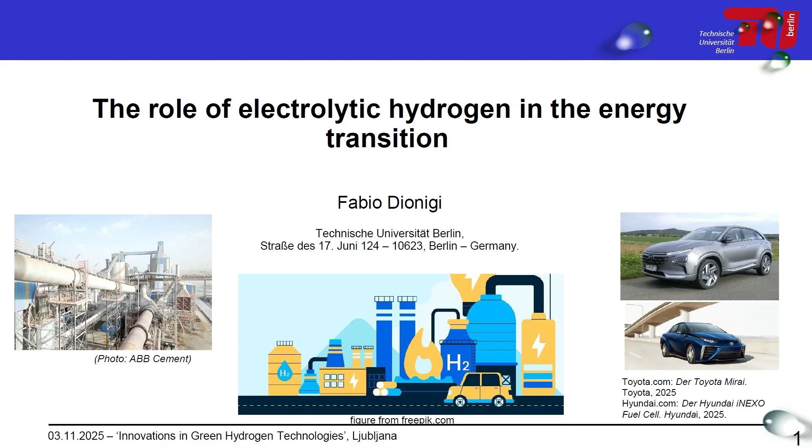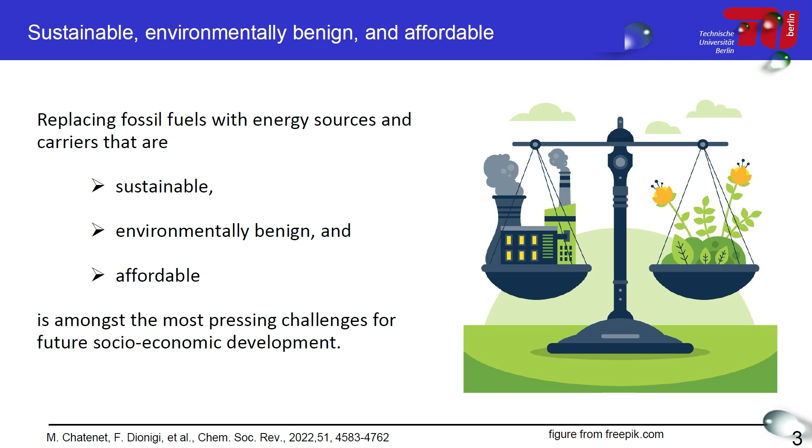What we are facing now is a great challenge to transform our society. A key part of this challenge is to replace fossil fuels with new energy sources and energy carriers that have to be sustainable, environmentally benign, and affordable. In order to do this, we can see that this challenge is strongly entangled with other processes, such as the growing population that we are experiencing.

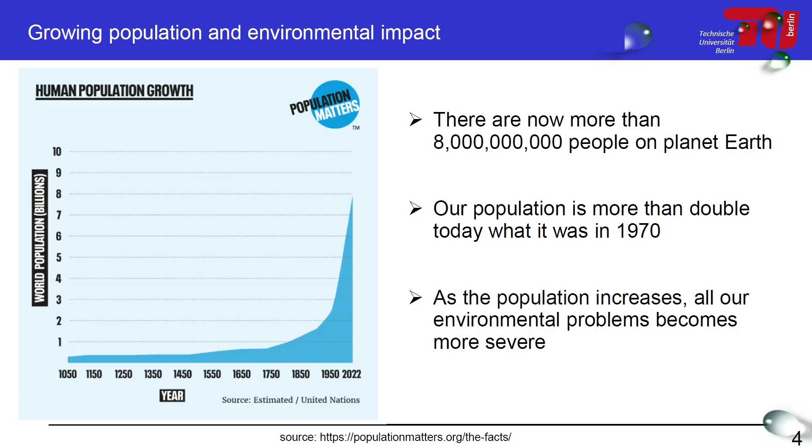This is a graph from Population Matters, where you can see not only that we now reach 8 billion people on planet Earth, but what is also important is to see how quickly these numbers are rising. We are more than double today what we were in 1970. This is a very quick rise in terms of population. And of course, this big increase in population implies also an impact on the environmental problems we are facing.

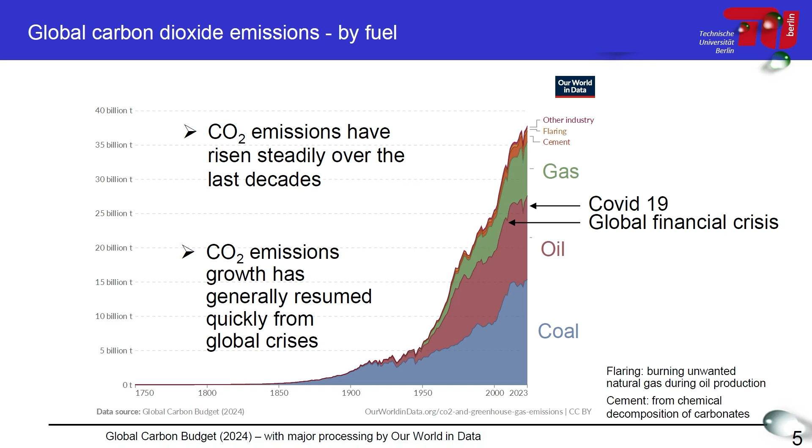This is important to show the impact of CO2 emissions from these fossil fuels like gas, oil, and coal, and other processes there.

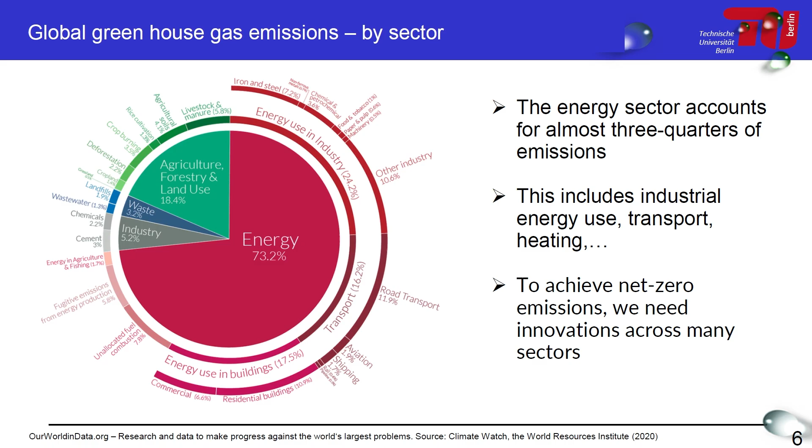Therefore, we can see that to achieve net zero emissions, we need innovation across many different sectors of human processes. One way to find a solution, which as we can see is not simple because it implies solving many different challenges, is probably to strongly decarbonize and electrify these processes.

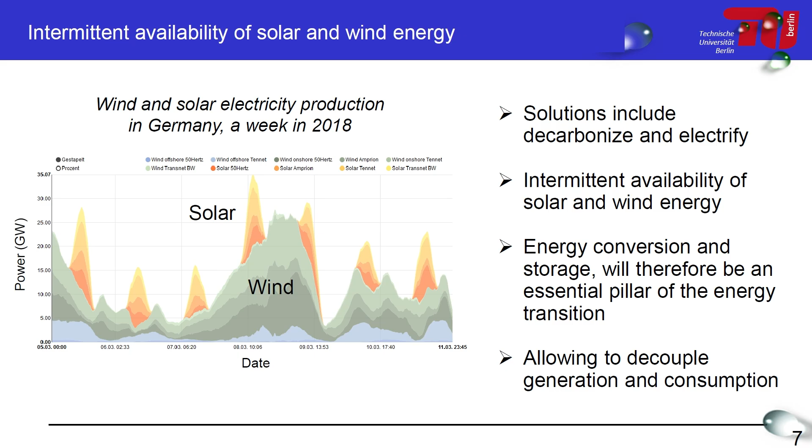But we know that some renewable sources have intermittent availability. This is the case, for example, of solar and wind, as you see here in this graph from Germany, a week in 2018, and as we experience every day. Therefore, it's very important that we are able to convert this energy and store it in a way that we have it available when we need it - in other words, so that we are able to decouple the generation and consumption of this energy. So energy conversion and storage technology will really be a pillar of this energy transition.

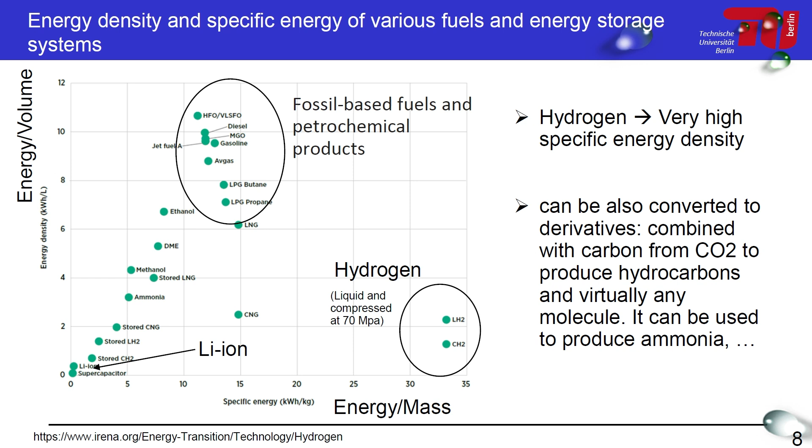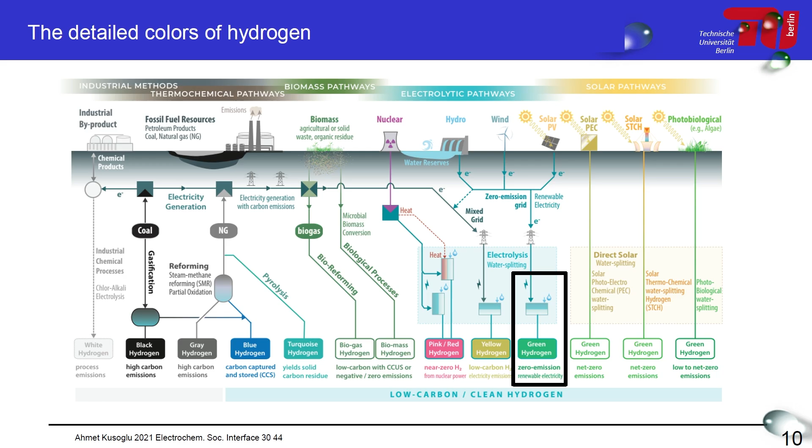Of course, other types of hydrogen are also interesting. For example, blue hydrogen, where the carbon you emit, you recapture. I'll also discuss today this as an interesting application and pathway towards decarbonization.

So we said hydrogen can be produced by electrolysis, using renewable energy sources, and this is called green hydrogen. Here I'll show you four major types of electrolysis technology. These, of course, are not the only ones around.

There are more alternative approaches, even membraneless ones and so on. But here I just focus on the ones that are more widely discussed and developed, and that have reached a very high level of TRL and commercialization. One of these is alkaline water electrolysis, which we also heard about before in the talk from De Nora, and also in the previous talk from Chile.

So we have alkaline electrolyte on the furthest left. Here, for alkaline water electrolysis, we have the electrodes in a high concentration KOH solution, and we have a separator, a diaphragm. This is very well established, with many years of operation.

Then we have the PEM water electrolyzers. Here we have the PEM membrane in the middle, and you can see you can run it with just water in this case. The membrane allows the transfer of protons. This is another commercialized solution, with megawatt electrolyzers that one can buy, and it's quite established. One requirement is the use of noble metal catalysts, compared with alkaline water electrolysis, and they have many different other properties that I will not go into detail on now.

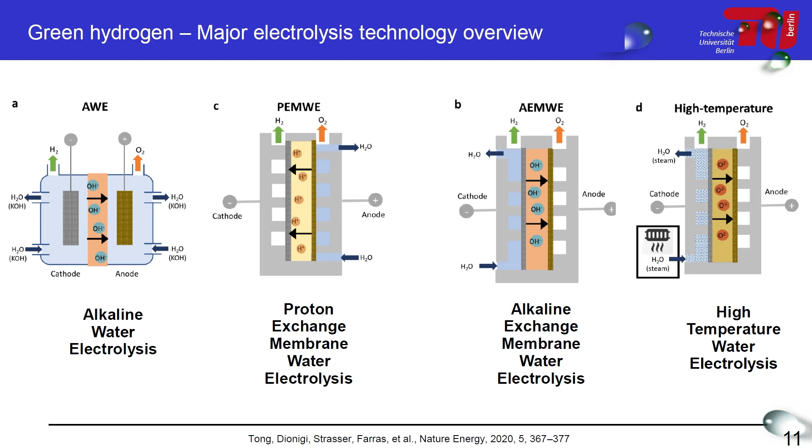Finally, I'd also like to mention the high temperature solution. Here I combine just one type of device, but high temperature solutions include different approaches like solid oxide and proton ceramic conductors. Basically, this works with water steam, and here the transport is of oxygen ions. We also reviewed this, among other approaches, in one of our reviews in Nature Energy a couple of years ago - you can read more details there.

Okay, so now I'll show you some different approaches very quickly, and now we can see what are actually the components of this type of technology. So here, what is important to realize is that it's actually a multi-level system. If one wants to optimize this technology, one has to look at different levels of complexity.

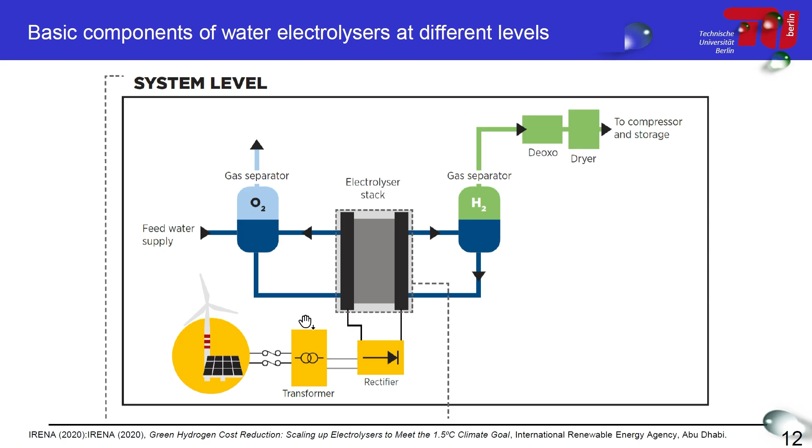So we have the system level, where this slide is of course extremely simplified. We have the tank, for example, for the two gases, and their gas separator. We have a dryer, and we have the electrolyzer stack, which we can say is the heart of the plant. And then we have the renewable energy and all the components for the electricity part.

So this is one level of complexity, the system level, but then we can go more inside and look at the stack. In the stack, we have a component called a cell, where we have a bipolar plate, and within the cell we have a membrane, the separator, an oxygen evolution electrode and a hydrogen evolution electrode. And then we have a porous transport layer that connects the electrode to the bipolar plate and allows mass transport in this cell. By repeating the cell multiple times, you form the stack.

The development and optimization of the stack is a level of complexity on its own, which is challenging due to the large dimensions involved, the optimization of parameters, and the homogeneity and inhomogeneity that can happen in this type of system.

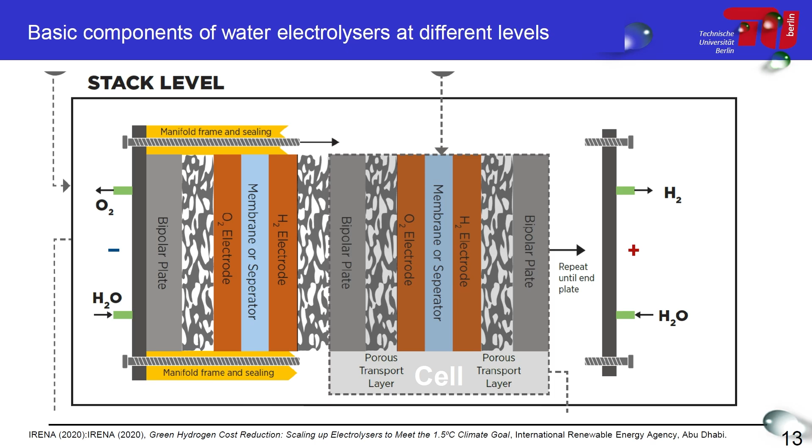Then, as already introduced, we can go even further into the cell level. When we look at the cell, we can look in more detail at what happens in this catalyst layer. You can see here in green the membrane.

Then we can see two types of catalyst layer development here. This is an example that refers to PEM water electrolysis, where you can see we have as anode, iridium and ionomer inside. And on the cathode side, we also have the ionomer, and then platinum nanoparticles on a carbon larger support.

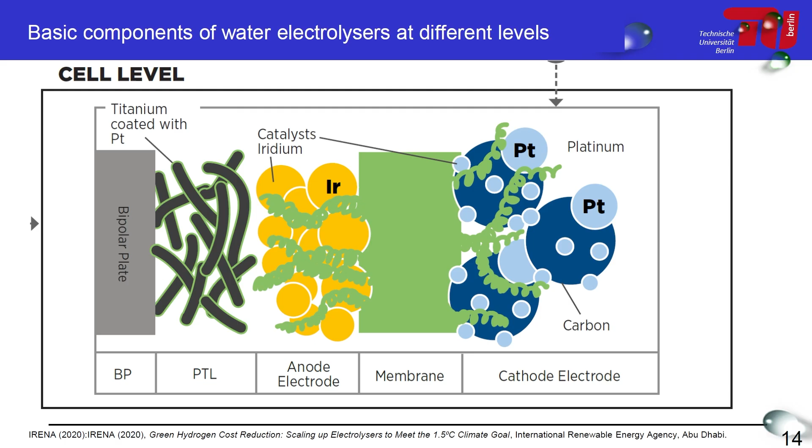So this shows the level of complexity we have, because every component needs to be individually addressed and also understood in terms of how they work together in the system. To understand them separately, we can study them with some sort of ex situ method, or in a 3-electrode cell, where we can individually address, for example, the catalyst. But they really have to be understood when they are inside the cell, how they activate, and how the system performs.

Here is an example of how we can look into how they work within the cell. Actually, it's very difficult to look inside the cell. So when you mount all this material together, normally you just look at the voltage, which includes contributions from all the components. What would be very nice is to actually be able to look at the different components individually.

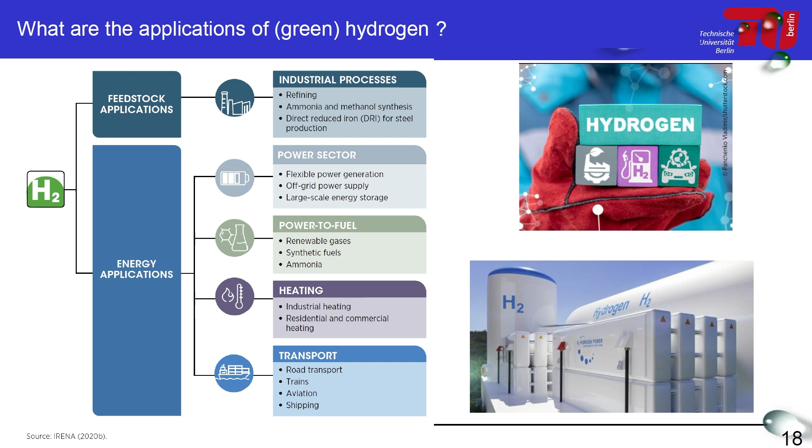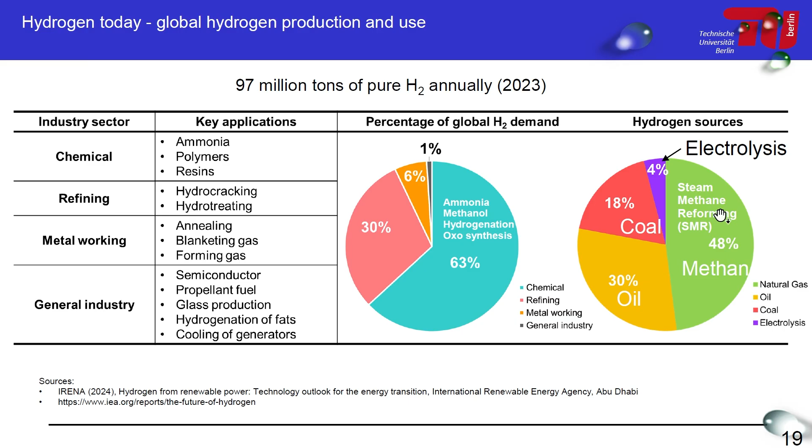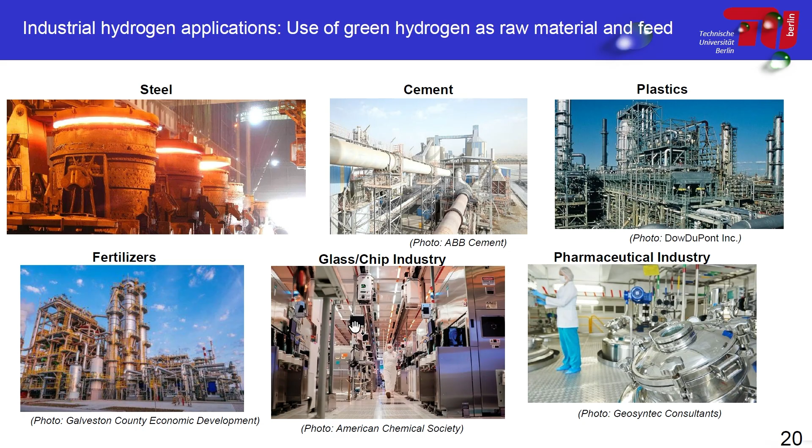Here is another series of pictures showing applications of green hydrogen, especially in the industry sector: steel production, cement, and other chemical and industrial processes, such as ammonia and fertilizer production. This shows how diversified the use of hydrogen can be.

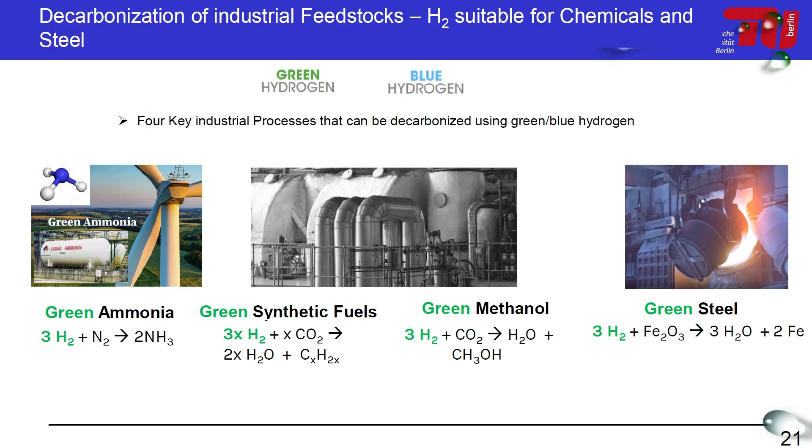Here are a couple more examples of processes, such as green steel, where we use hydrogen to produce steel from iron oxide instead of coke. And then we have ammonia, methanol, and so on. It's really diverse and very interesting, and there are already companies applying this, for example, for green steel.

We saw industrial applications briefly, and now we can also look at transport applications. Where are we standing now? First, let's talk quickly about passengers—these are so-called light-duty mobility applications, and here the technology in use is fuel cell technology.

You can see here a photo of two cars you can buy nowadays in Germany: the Toyota Mirai and the Hyundai Nexo. It's interesting, for someone who has worked in the field a lot, to see that you can actually buy this car with a fuel cell. Also interesting that even though in Europe, and in Germany in particular, we have many car manufacturers, the market is now dominated by two Asian brands in the field.

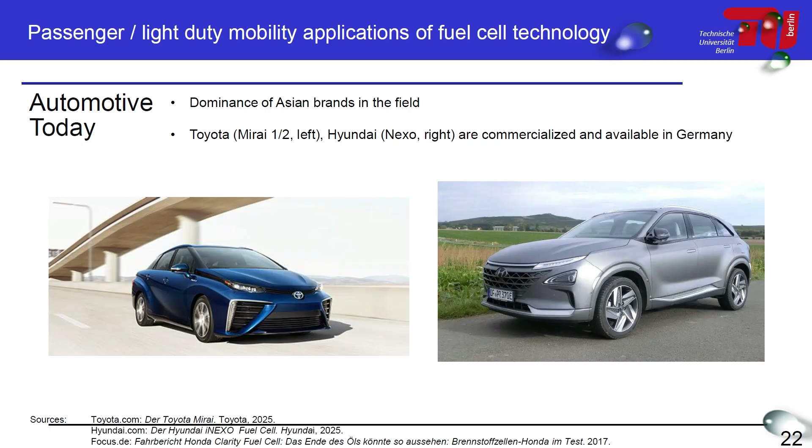Even though many companies are researching this, another problem related to the car is the infrastructure. For hydrogen, it's quite a challenge to implement a refueling station.

But things can change a bit when we look at other types of transport we can consider. One application is material handling. This is interesting because the big advantage of this type of vehicle is that they don't necessarily have to move a long way—they stay in their factory or logistics center and just need to operate all the time, so fast refueling could be interesting. This is an important application where hydrogen can have a substantial impact.

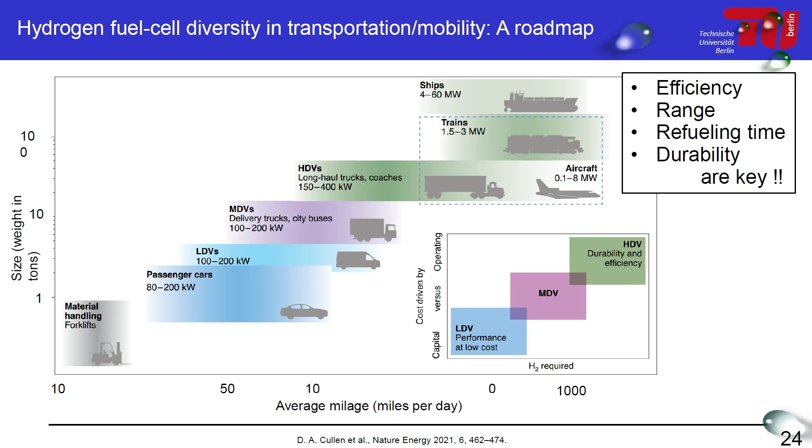What's interesting when we move focus from light duty to these heavy duty vehicles is that since they operate over longer distances, operation costs become very important, and therefore the way you design your system can also tune the parameters differently. So your strategy is not necessarily the same as for the passenger car.

Here you really focus on efficiency because that implies the cost—how much hydrogen you consume, the operating cost, the range, and also refueling time and durability. Durability is really the key here.

On top of this, the interesting thing is that many times this vehicle just has to go from one point to another point. So in terms of infrastructure, it's much easier to develop, because you can just have your hydrogen refueling station on one end and the other end, which simplifies things. So there's a strong push now, and maybe this will be the first big or dominant area in the field of moving to fuel cells in the near future.

So we spoke a little about fuel cells. This is an example of a PEM fuel cell, which is at the moment the dominating commercial solution in the market. You see it's very similar to what we saw in PEM water electrolysis structure—we have a membrane electrode assembly with catalyst on both sides, then what is called GDL, which is still your transport layer, and then the bipolar plate at the end.

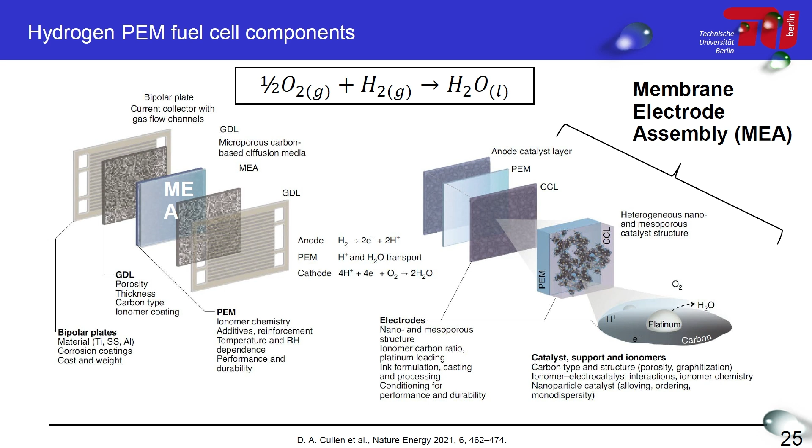When we look inside again, we can see that every component has its own complexity, and the catalyst layer here is made of, for example, nanoparticles on a larger nanoparticle support. So we have different scales of complexity from nanometer to micrometer and so on, which requires research in all these aspects. In this case, water management is also a big challenge, and that's what researchers are active on nowadays.

Here is a quick example of where the costs are distributed for a PEM fuel cell stack, based on a 160 kilowatt system. It basically shows how a big part of the cost is taken by the bipolar plates, because they are very massive and take a big part of the cost. But also the catalyst, because in PEM we have to use platinum, so we are strongly relying on platinum.

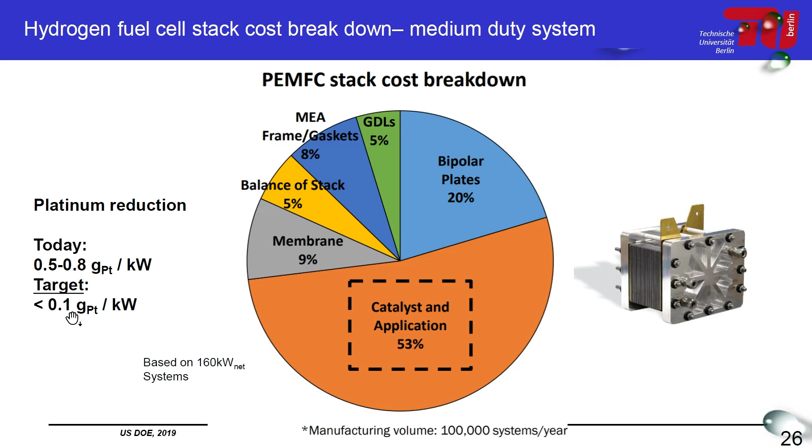A big challenge in research is to reduce the amount of platinum to achieve a certain kilowatt of power. This summarizes one of the targets to reach. With this, I will move quickly to the conclusion with a couple of slides covering the future scenario, after having covered a global overview, hydrogen production, hydrogen use, possible utilization, and what we need to do for the future.

What is peculiar of these systems is that there are trade-offs, for example between efficiency and durability. You would like to increase the efficiency, but what you try to do might impact the durability.

To give a simple example without using too much time: the membranes. If I want to make my membrane more durable, I will try to reinforce it, but this will most likely increase the size of the membrane, which will imply a loss of efficiency in the system due to higher ohmic loss. So it's always a compromise that one has to consider, and this is what we have to try to find, the best solution.

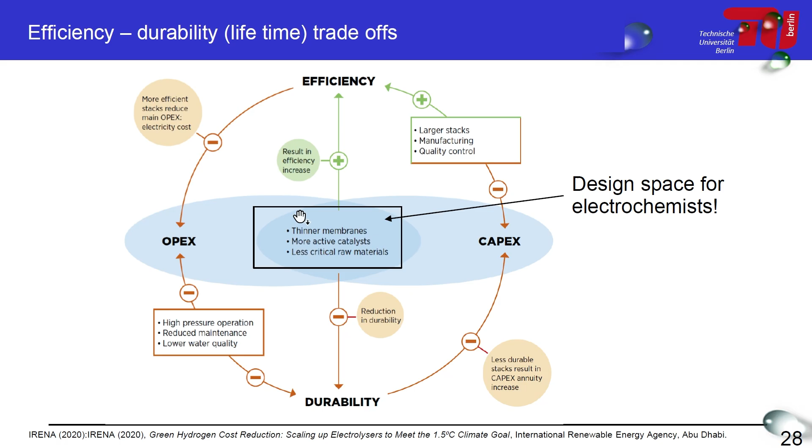In all these developments, including the system level, electrochemists can have a big impact, because there are many parts of the system that electrochemists can tackle to solve this challenge.

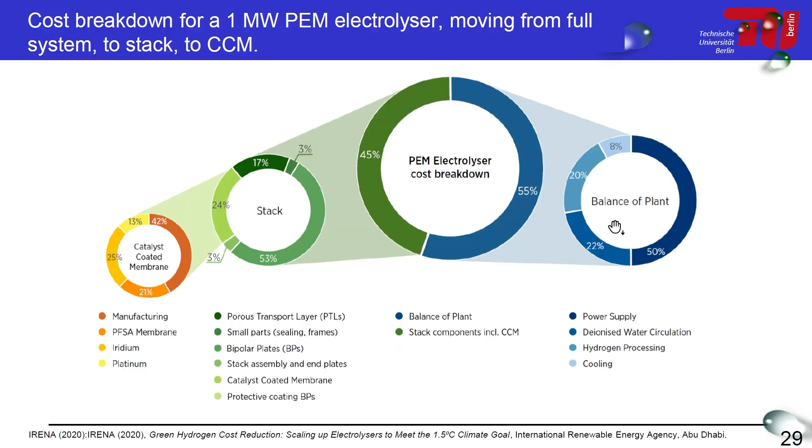Here again is a breakdown, in this case of a PEM electrolyzer, and we can see that the balance of plant is not negligible. It can take a big amount of the cost, but also, as we said, the stack and catalyst part.

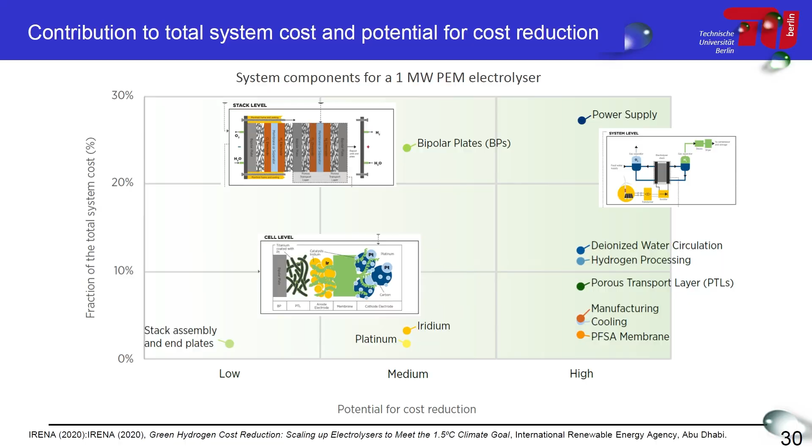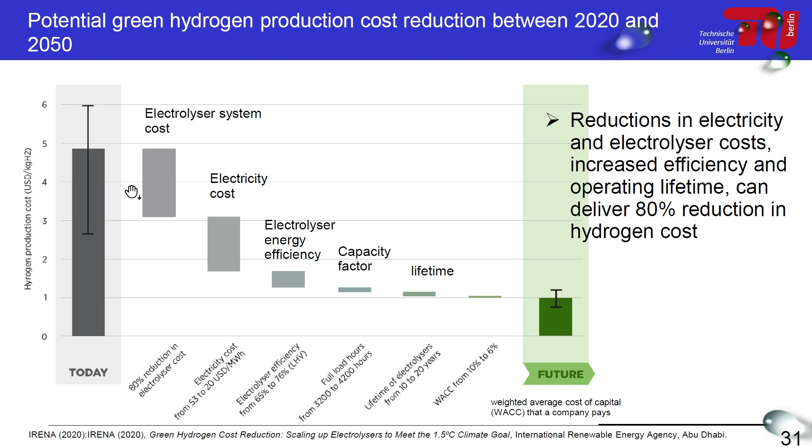Basically what we can see is that with the electrolyzer system, if we are able to decrease costs this much, we need an 80% reduction in electrolyzer cost. But that will also not be enough; what is expected is that electricity cost also has to be reduced. That's actually another big factor in this future scenario prediction.

This brings me to the conclusion of the talk. We saw that green hydrogen can play an essential role in the energy transition. It acts as a green energy carrier for the transport sector. It can help decarbonize many industrial processes, such as steel and ammonia production, methanol, and it works as electrical energy storage, and can provide heat for industrial heating applications.